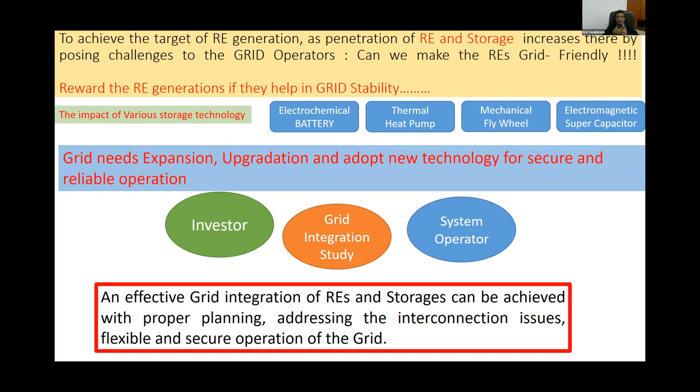We can have proper planning, we can address the interconnection issue. Therefore, certain grid codes have been developed in different parts of the world - Europeans have their own grid code, India has its own grid code, so everybody has their own grid code. It tells about the strategy of integrating this renewable into the grid so that the grid becomes robust and should not lose its stability. So we want a flexible and secure operation of our grid.

So the smart grid technology which we are focusing upon is the flexibility service from distributed generation. We are coming up with a prosumer driven approach.

Suppose I have rooftop solar in my home, in a society, or in a smart building with solar generation of your own. Either you consume your own power, or if you have surplus power, you can sell it to the grid so that during peak generation hours, the grid impact can be tolerated to some extent. That is generally what we call local power balancing.

We do demand response, so the consumer as well as the producer. If I have rooftop solar, I act as a prosumer - I am a consumer, I am a producer. But when I have to produce and when I have to consume should be balanced by some policy, by some incentive. Otherwise, I won't go for that.

That's why the new smart grid technology, even in India, we are now planning to propose or implement demand response. And similarly, storage is another choice.

For example, if you cannot deliver, you have excess energy - you're producing more solar energy in the daytime, but all my appliances are not used during that particular time. So I'm talking of a single home. If there are thousands of homes, hundreds of homes together in a cluster, now it's a concept of a microgrid. We can frame our autonomous microgrid so that my power can be used by my neighbor.

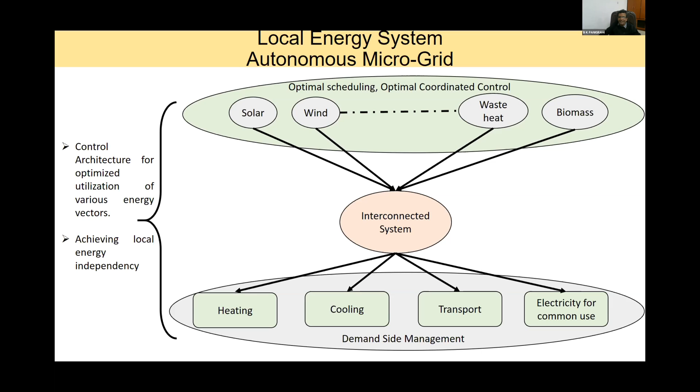So there are two things I will discuss: either it is an autonomous microgrid where there is no grid, or you can interface it to the grid and have a balance so that your dependency on the grid can be reduced. This requires one of the standards recently developed in India, particularly for the interconnection of renewables and how ancillary services can be achieved by these energy sources.

These are some electrical parameters - how to maintain the voltage, how to control the frequency, how they can take part in different ancillary services. I'm not going into the detail of that, but these are the standards. My sincere request to young researchers is that they are also encouraged to look into these standards. The standards may vary from country to country, but at least the range of voltage and frequency which you can tolerate can be decided by regulatory commissions.

So finally, this is a microgrid. We can work in this microgrid having a lot of communication technology. Once you have the communication technology, the challenge is cyber security. Cyber security is a must in the smart grid scenario, particularly to protect this critical infrastructure. So that is another aspect of the research domain in this particular area.

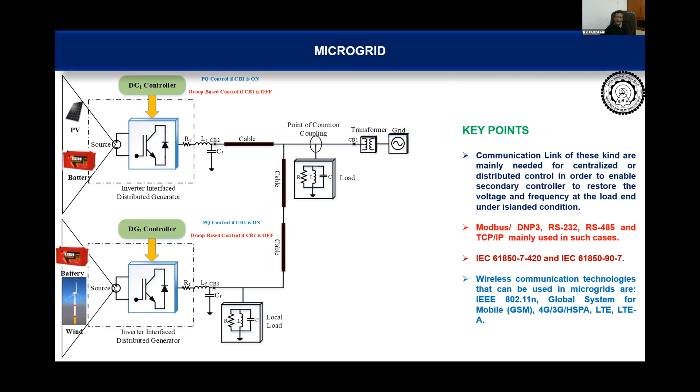These are the challenges which I have already put to you. And thank you - I'm just concluding my talk because I've just crossed the time by 2-3 minutes.

Basically, my emphasis here is on the various research domains which can be incorporated into an existing grid. The research can be done in any part - either it is material development, it may be solar cell material, fuel cell material, it may be anything, heat energy production, local energy support. My sincere request is that there are various vectors of power generation, and these vectors of power generation have to be efficient simultaneously.

Why we are generating it? It has to be integrated to the grid. So we have to look into also the grid condition. We have to support the grid, because all these generation are power electronic generation, which make pollution to the grid. Pollution in the sense the injection of harmonics and other things. So we have to avoid that. So that is the main thrust research area.

So last line, this research is interdisciplinary research. So we have to join together to do this particular interdisciplinary research and do something in this energy sector or storage sector. It is not an individual research. So that's why all the ideas which will be gathered today, we'll take it as a challenge. We'll try to solve different challenges.

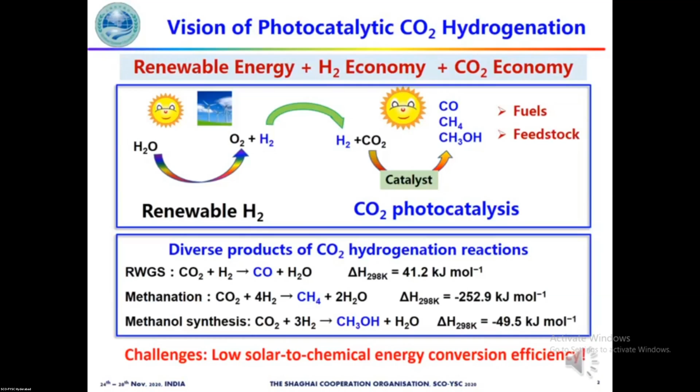To improve the energy conversion efficiency, a new photocatalytic pathway was recently developed based on the photothermal effect of nanostructured catalysts. In this process, the catalyst is locally heated to a high temperature by the sunlight and then drives the thermocatalytic reactions. This photothermal-catalytic pathway can utilize many more photons from the sunlight, essentially across the entire solar spectrum. However, the photothermal properties and catalytic performance have to be balanced in existing photothermal materials, and these two parameters are key factors affecting the efficiency.

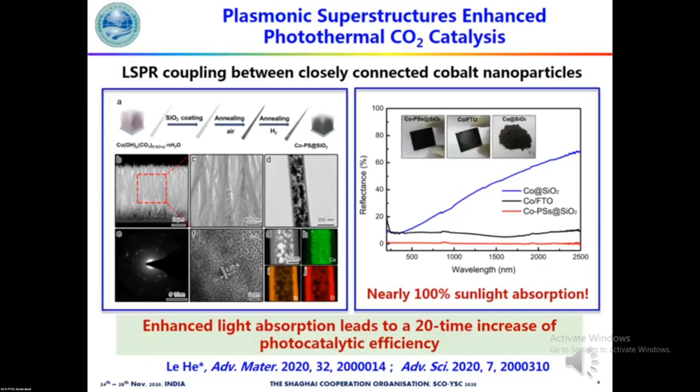My group has made great effort in the development of catalysts with enhanced photothermal catalytic properties. We have been trying to improve the photothermal property of materials without sacrificing their catalytic performance. Here, I just want to show you one example of our catalyst, which can maximize the absorption of sunlight and thus increase the photocatalytic efficiency by 20 times.

I have to point out that there's still plenty of room for further improving the energy conversion efficiency of photothermal CO2 hydrogenation processes. Along this direction, we will design catalysts with both excellent photothermal and catalytic performance by breaking the limitations of existing materials. By doing that, we hope to achieve a 5% efficiency of solar to chemical energy conversion in the near future, which is comparable with that of natural photosynthesis.

To make our dream come true, it is necessary to find collaborators from different areas. First of all, besides materials, the design of a photocatalytic reactor is also very important to increase the energy conversion efficiency. Experienced chemical engineers are more than welcome to help us design better reactors. Second, we are also looking for collaborative studies on the mechanism of photothermal catalysis. The knowledge on the mechanism is very useful to provide a guideline on how to design better materials. We are particularly looking for experts on the simulation of catalytic processes.

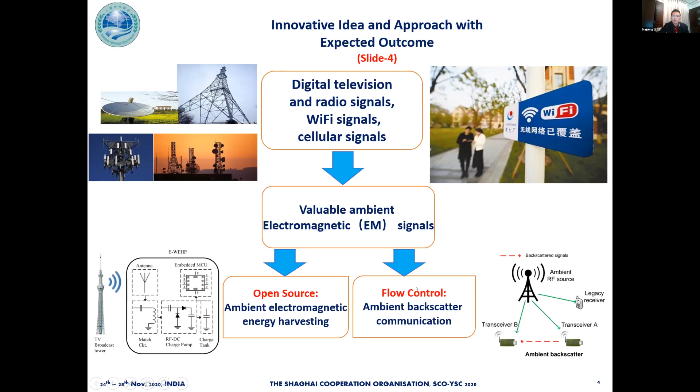So for ambient EM energy harvesting, the traditional method is to use a rectifier antenna to convert the radio frequency energy to direct current and then store it. But in our group, we achieved the conversion from radio frequency to direct current by loading PIN diodes directly on the strong currents at the metasurface.

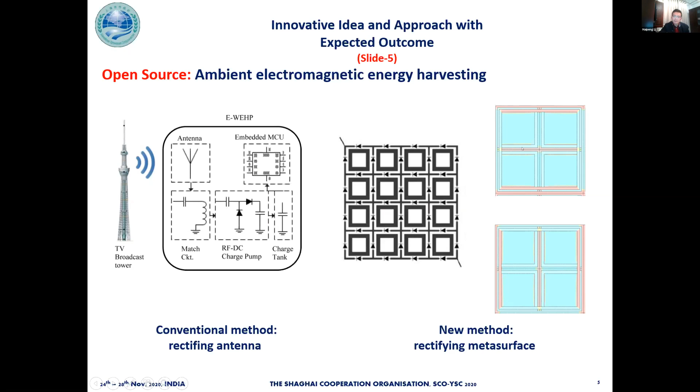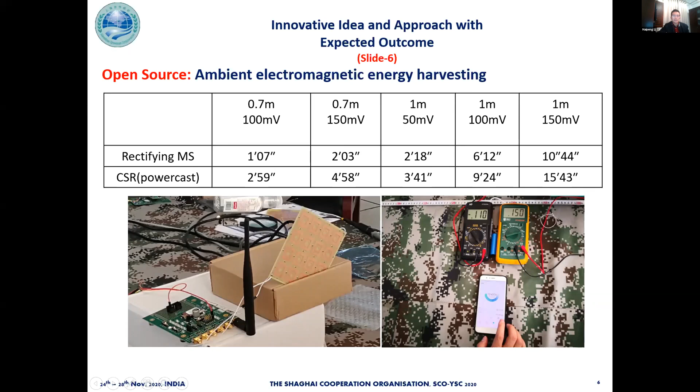We compared the CSR evaluation board of Powercast Inc. with the rectifying metasurface we have designed. By recording the charging time at the same distance and power, the results show that the new method can harvest energy almost twice as fast as the traditional one.

When the PIN diodes on the metasurface are turned on, the input waves will be reflected, and we can regard this state as state 1. And when the PIN diodes on the surface are turned off, the input waves will be transmitted, and we can regard this state as state 0. By controlling the states of the PIN diodes, the information can be modulated on the scattering waves easily.

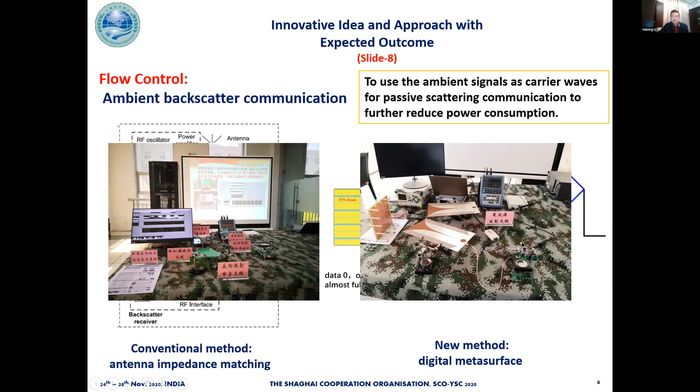Here are the traditional and the new ambient backscatter communication systems built by our group. The left picture is the traditional one, the right is the new one. The new system has a communication distance over 50 meters.

In summary, our research will provide new methods for the realization of a new generation of IoT with high spectral efficiency, no energy consumption, and no maintenance. So in the future, we can conduct extensive collaborative research in many areas, such as intelligent agriculture, environment monitoring, intelligent building control, wearable body information sensing, and smart home.

In related fields, we have already worked with the research group led by Professor Probert at the Indian Institute of Technology. So far, we have an invited paper in IEEE ISWC 2019, and we also have a collaborative paper in IEEE OJCOMS. As the results show, our method can achieve better transmission reliability with the same spectral sharing factor.

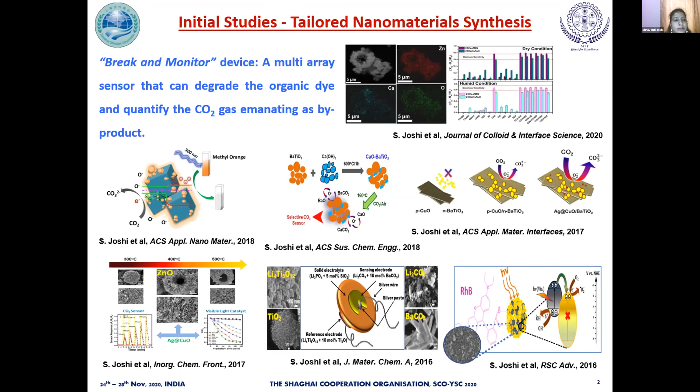Moving on, calcium titanate with a basic chemical formula ABO3 has a distorted perovskite structure and is an incipient ferroelectric and diamagnetic material. In a first of its kind, exotic calcium titanate nanoarchitectures were synthesized using a solvothermal method with tailored facets and an in situ self-doping mechanism. Here the X-ray diffractogram reveals high crystallinity and an orthorhombic crystal structure. Further, if you see the FESEM images, you can realize good quality tailored facets.

Further, here we did not use any co-catalyst and still managed to achieve a better CO2 conversion rate, as illustrated by this image. As for the conclusion of the study, among all the nanostructures synthesized, only hierarchical spheres gave us good photoreduction capabilities. Under UV light, 3 times more fuel-based products were produced, whereas under visible light, we were able to achieve 8 times the capacity. This is when compared to standard anatase titanium dioxide. Based on these encouraging results,

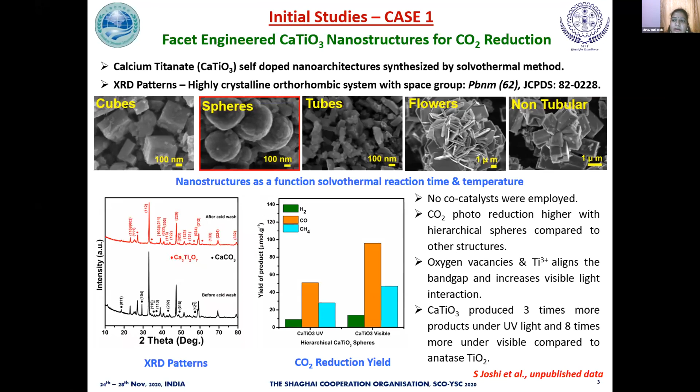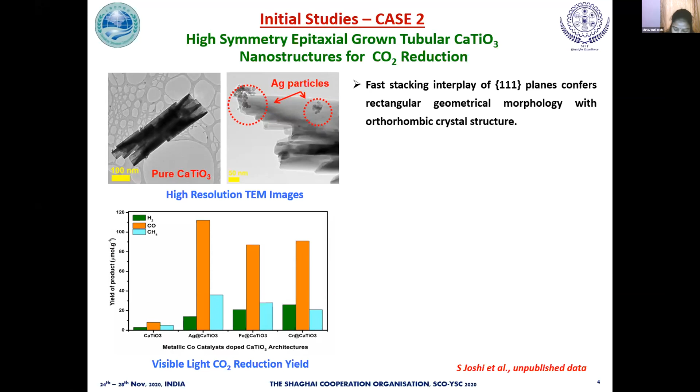we further developed a different chemical strategy wherein we used high symmetry epitaxially grown tubular calcium titanate nanostructures for photocatalytic CO2 reduction. A careful observation of XRD and TEM studies reveals the fast stacking interplay of (111) planes confers a rectangular shape with orthorhombic crystal structure. Now here, compared to the dopants we have used, that is silver, iron, and chromium, with silver nanoparticles we managed to get very good photocatalytic CO2 conversion rates. Further, the three-dimensional nanoarchitecture enabled more light harvesting activity.

Here, the metallic dopants used did not alter the crystal structure, but on the positive side, they enhanced the optical absorption by fine-tuning the band gap. Although the results were exceptional, these results are only good from a publication point of view. If we see commercialization plans, a few drawbacks such as difficulty in forming good quality thin films as well as photocorrosion really hindered our plans for commercialization.

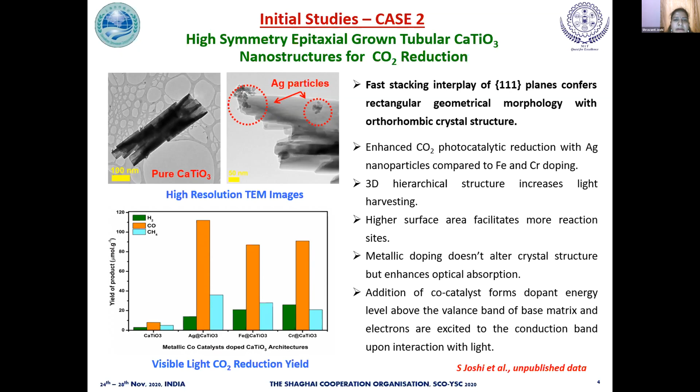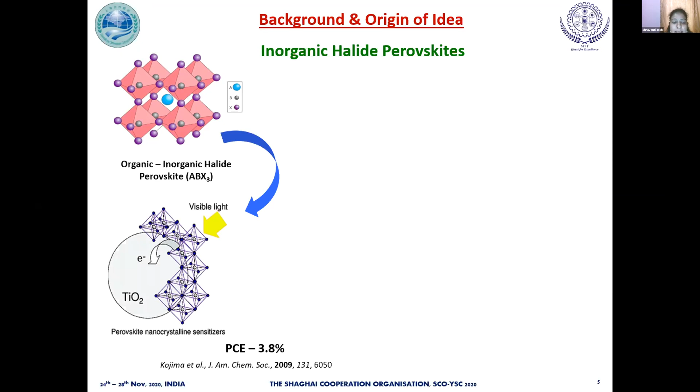Again, we were back to zero position, and at this point, we really pondered over many materials, and the search led us to organic inorganic halide perovskite. Now, these perovskites are very promising in solar cell application. Their sudden increase in popularity was observed when organic inorganic halide perovskite solar cells showed improvement in power conversion efficiency from an initial value of 3.8%, as reported by Kojima et al., to 22% in a matter of just 6 years.

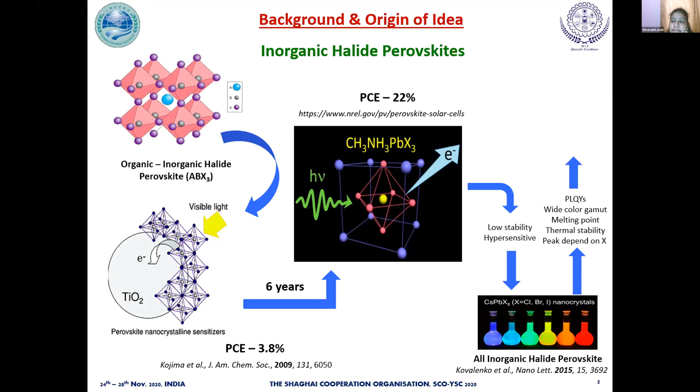In the wake of such remarkable performances, a few demerits such as high sensitivity to humidity, oxygen, heat, as well as low stability restricted their use. Now, inspired by these drawbacks, in 2015, Kovalenko et al. for the first time reported on an all inorganic halide perovskite comprising cesium, lead, chlorine, and bromine. In addition to overcoming the previously mentioned issues, the inorganic halide perovskite in the report showed many excellent properties as listed here, thus hinting at a class of exceptional nanomaterials for CO2 conversion.

In recent time, Kuang et al. and Xu et al. reported on cesium lead bromine quantum dots for photocatalytic CO2 reduction. In both the reports, exceptional results were mentioned. But if we look very closely, lead toxicity and lower service life further restrict the commercialization plan.

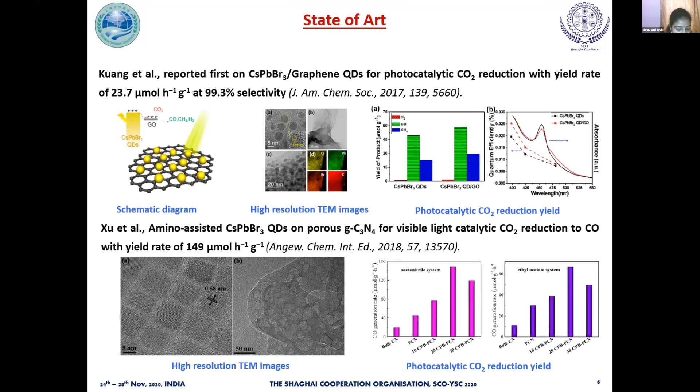Now, inspired by such scope, through our ongoing DST project, we plan to overcome these issues by developing lead-free inorganic halide perovskite-based cost-effective devices. Currently, we are focused on developing portable devices integrated with solar ink based on such perovskite nanocrystals. The work is being done in collaboration with Aston University UK and Greaves Cotton Limited India.

Now, recent trials gave us good results in terms of highly monodispersed spherical morphology using green chemistry routes. Further, we were able to form single crystal thick films on glass substrate and effectively reduce CO2 gas to value-added products. As per our trials, we are very confident that the solar ink technology that we are developing in our lab has full potential for adoption from a commercial point of view for green fuel production. We are currently working towards two main outcomes in terms of improved process conversion efficiency as well as gram scale synthesis.

Scientific collaborations for us are an opportunity to engage in collegiality and lend credibility and validity to our research activities. We are actively engaged with many overseas universities in terms of knowledge transfer, development and fabrication of prototypes for energy generation, chemical sensors, and medical diagnostics. Currently, we have Dr. Wiley, who is a collaborator through the DST project. A few months back, we had also collaborated with Professor Tamara from Tomsk State University, Russia.

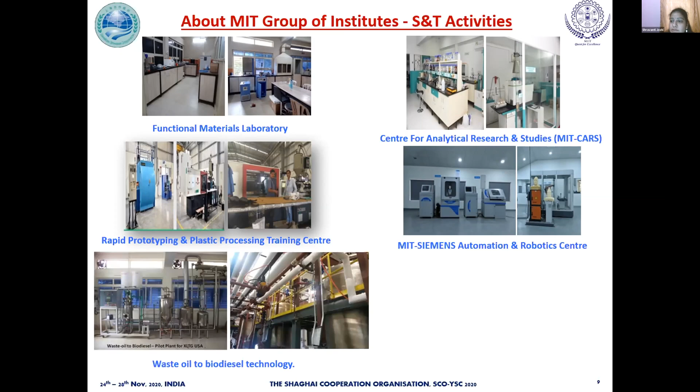At MIT Group of Institutes, we have a wide range of basic science and technology-based activities going on. For starters, we have the Functional Materials Laboratory, which is a DST-sponsored lab fully equipped to carry out research in the areas of nanomaterials engineering, chemical sensors, and heterogeneous catalysis. Then we have MIT CARS, related to agricultural activities, soil testing, and so on. Then we have rapid prototyping and plastic processing training centers, and an automation and robotics center as part of advanced CAD/CAM/CAE learning. We have also in the past done a few biodiesel related projects as well as solar power plant projects.

Moving on, currently we have a BIRAC sponsored MedTech lab and incubation center. Again, MIT SIP, which is an industry relevant micro enterprise dealing with plastic processing. Then we also have the Center for Advanced Material Research, which basically houses all high-end instruments for characterization. Again, we have ARDC, which is related to agricultural activities. Currently, this ARDC is in collaboration with Israel and other overseas universities.

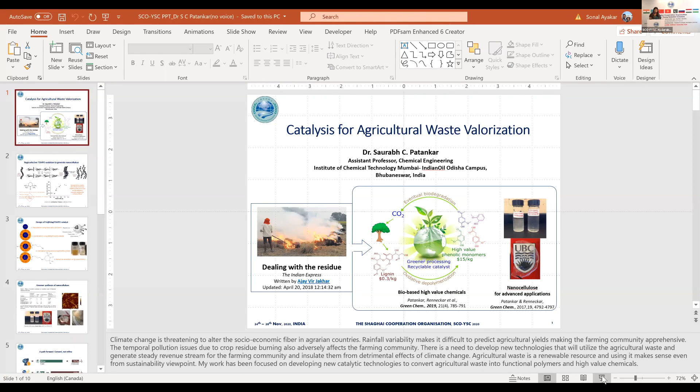I hope you can see the screen and I'm audible. Hello everyone, I am Dr. Saurabh Patankar, joining from the east coast of India. I am happy to share my perspectives on utilization of one of the largest available natural resources, agricultural waste, and how it fits into the overall scenario of sustainable energy.

Climate change is threatening to alter the socio-economic fabric in agrarian countries. Rainfall variability makes it difficult to predict agricultural yields, making the farming community apprehensive. The perennial pollution issues due to crop residue burning also adversely affect this farming community. There is a need to develop new technologies that will utilize agricultural waste and generate a steady revenue stream for the farming community, insulating them from the detrimental effects of climate change.

Agricultural waste is a renewable resource, and using it makes sense from a sustainability viewpoint. My work has been focused on developing new catalytic technologies to convert agricultural waste into functional polymers and high-value phenolic chemicals. One such high-value functional polymer that can be made from biomass is nanocellulose.

Nanocellulose has a tensile strength like steel. It can be used to make transparent films with excellent gas barrier properties, giving it wide-ranging applications. This molecule, 2,2,6,6-tetramethylpiperidinyl-1-oxyl, or TEMPO, is a classical oxidation catalyst traditionally used to...

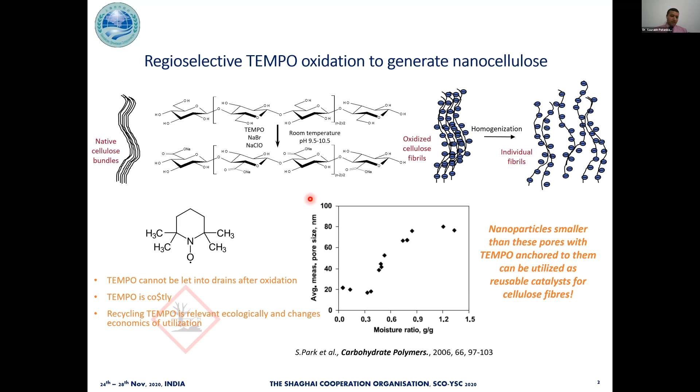I chose to anchor TEMPO on iron oxide nanoparticles that can be easily separated at the end of the reaction using a magnetic force. However, iron oxide is susceptible to change in its oxidation state due to reaction conditions like high pH and the redox environment. So I coated these nanoparticles in silica or glass and then covalently anchored TEMPO by consecutive silanization and reductive amination steps.

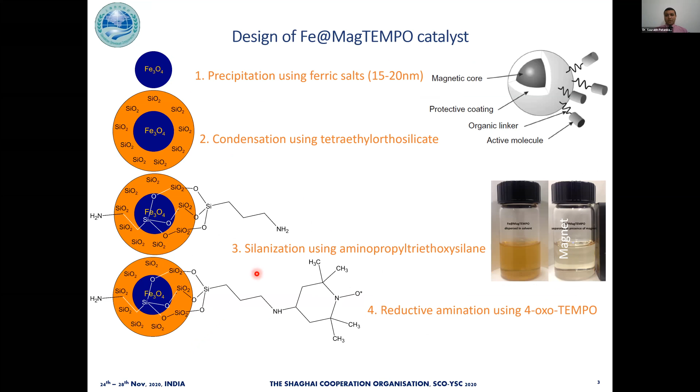I was able to synthesize nanocellulose with the same properties as one made from the usual homogeneous or free TEMPO process. Even the rate of reaction with hindered TEMPO due to anchoring on nanoparticles was similar to the free TEMPO reaction rate, albeit at a slightly higher temperature.

We further used this sustainable nanocellulose, made using this new heterogeneous catalyst, to make tubes which can further be used for some biomedical applications.

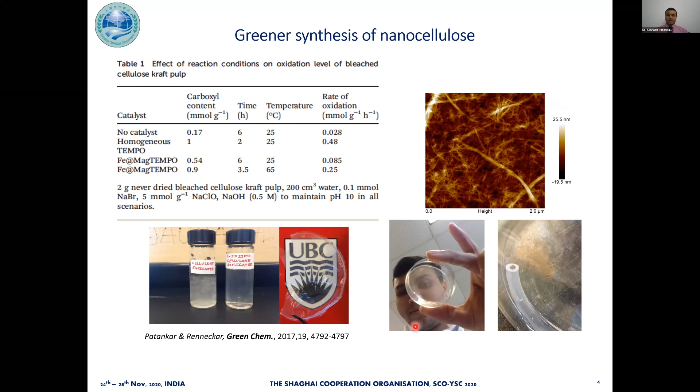Now, moving into my current research and the way forward, I strongly believe that measuring is knowing. I developed a metric called the V factor to estimate the profitability of biomass valorization processes, considering factors like capital expenditure, operational expenditure, process yields, resource availability, price fluctuations, tonnage of manufacturing, etc. It has been a realization through that exercise that unless sustainability is the only goal, it is not profitable...

...to make only energy from biomass. If we focus only on the energy point, it really becomes difficult to compete with traditional fossil fuels, which are way cheaper in the current scenario than energy derived from biomass.

Biomass is a polymer with a unique combination of carbon, hydrogen, and oxygen, making it suitable to make functional polymers with only slight modifications. Depolymerization of biomass can yield chemicals typically made by isolating and oxidizing hydrocarbons. Thus, biomass is best suited to make high-value petrochemical analogs and novel high-performance materials. For example, lightweight, moisture-resistant textiles can be made profitably from biomass.

Now I'm currently working with a startup company on producing virgin cellulose pulp fibers, vanillin, and oxidized polymeric lignin from agricultural waste. The biomass is first fractionated into cellulose, hemicellulose, and lignin fractions using a benign organosolv process, followed by the oxidative depolymerization of lignin to yield vanillin.

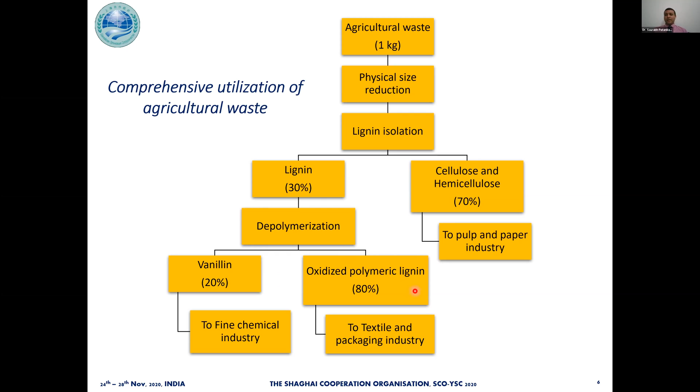So the point which I want to make here is that unless we use biomass for high value applications, using some of it for sustainable energy really is challenging from the economics point of view.

Continuing this work on making high value chemicals from agricultural waste, I focused on this step of making vanillin from the lignin. So I tested the efficacy of the oxidative depolymerization of lignin using the same anchored TEMPO catalyst. This catalyst has free amine groups on it on which the TEMPO is anchored, and I thought these amine groups might be able to give the basic sites essential to abstract the protons from lignin and then start the oxidative depolymerization using the redox sites given by this TEMPO.

The traditional oxidative depolymerization of lignin is done in an alkaline environment, and the process results in around 700 kg of alkali waste per kg of vanillin isolated.

I was able to do this reaction at neutral pH using hypochlorite as a primary oxidant, and I was able to get around 20% yield of vanillin and associated compounds, high value phenolic monomers from kraft lignin.

However, the vanillin yield varies with the lignin type, and I'm currently exploring the variations in order to develop a robust process. An interesting aspect in cost-effective biomass valorization process development is using such multifunctional catalysts that can be used as a divergent technology, targeting many feedstocks rather than developing unique technologies for targeted products.

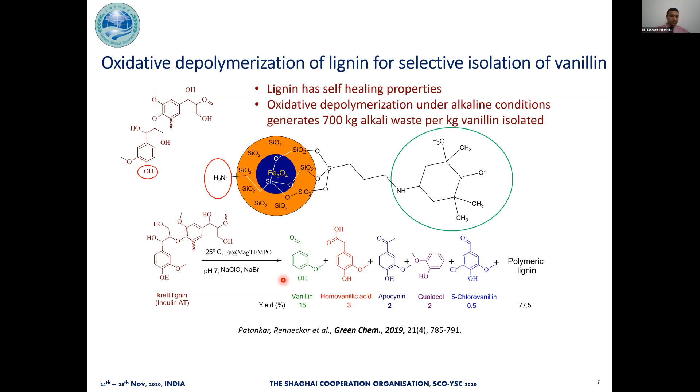Biomass valorization will also be profitable when all these bottlenecks in it, like pre-treatment, fractionation, catalytic conversion, and subsequent purification, are made cost effective and efficient.

So investigating structure activity relationships in materials and designing new catalysts for each of the plausible pathways in this catalog is one of my ongoing activities.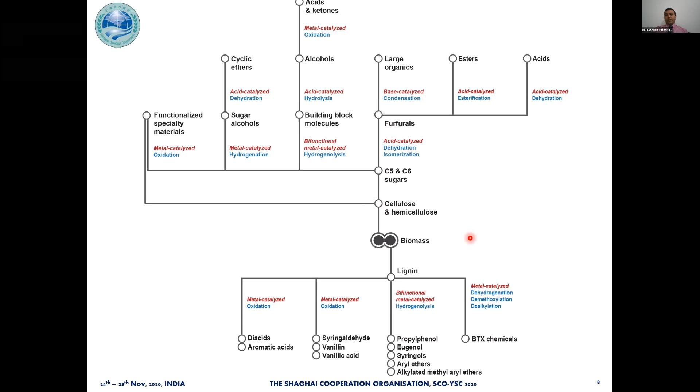So I have divided my work on biomass valorization into three broad categories and seek collaboration with SCO member states in these three domains. The first is focused on feedstock procurement and management, as identifying the quality and quantity of biomass produced with change in seasons is critical.

The second is on catalytic process development, wherein novel reactor systems have to be used for biomass valorization, where new reaction mediums like solid reactions, where the catalyst is in the solid phase as well as the substrate is in the solid phase, have to be used. So I have to explore the use of novel reactor systems for the one-pot fractionation and modification.

When we use these new systems of solid reactions, there is no mathematical framework available to model these systems and extrapolate the results for unknown process conditions. So I also want to work in this area of developing a mathematical framework for these solid catalyst, solid biopolymer interaction reactions.

The third area is on finding new applications for valorization products, as many of these valorization products which we can get from biomass do not have existing petroleum analogs. So we do not know the applications of these products, and based on the structure activity relationships and properties of those materials, we have to explore new applications for such materials.

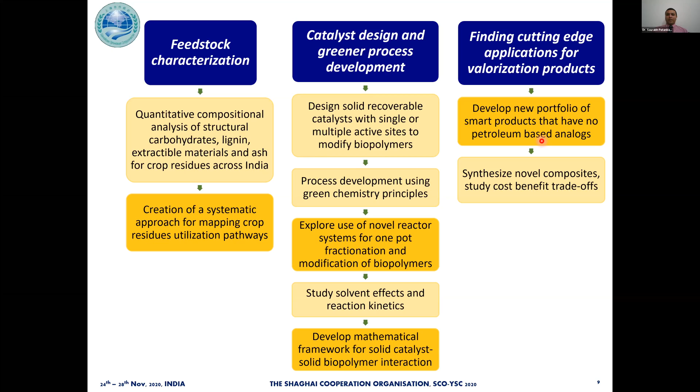Now, finally, talking a little about my institute. My Institute of Chemical Technology was established in October 1933, and it works with the intention of advancing India's knowledge reserves in chemical science and technology.

The institute has grown to become a premier university devoted to education, training, research, and industrial collaboration in chemical engineering, chemical technology, applied chemistry, pharmacy, biotechnology, and bioprocessing. Institute of Chemical Technology has been ranked among the top 10 engineering institutes of India.

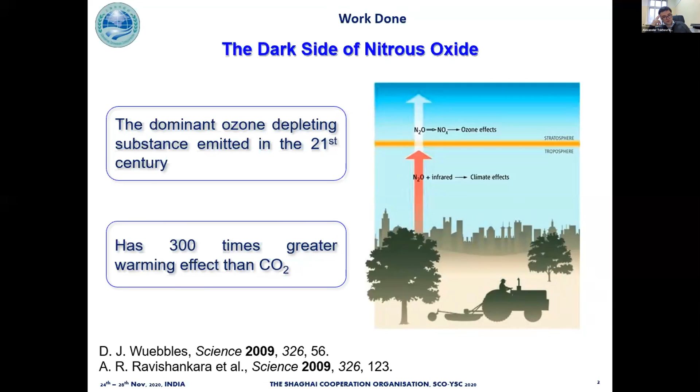And we believe that nitrous oxide is a promising reagent, and one can outline two main directions for developing the chemistry of nitrous oxide. For decades, people tried to exploit its high oxidation potential, to use it as a powerful oxidizing agent and oxygen atom transfer agent. And the second direction, which is much less explored, and I think much more interesting, is utilization of nitrous oxide as a building block for the construction of more complex organic molecules.

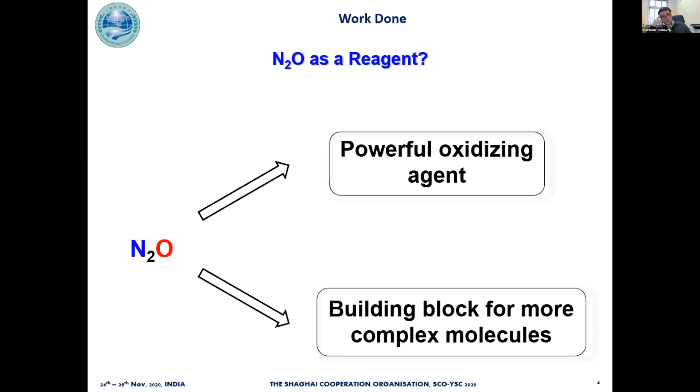So we worked on both of these directions, and here is a small summary of what we've done. I will very briefly mention our most noticeable achievements. We found that some highly labile ruthenium alkene complexes are capable of activating this highly inert nitrous oxide molecule. We even managed to establish some of the primary products of the reaction of catalysts with N2O. And these ruthenium systems are able to efficiently promote oxygen atom transfer to various substrates, so basically to oxidize them.

Also we found that very basic and relatively cheap organometallic compounds also react with highly inert nitrous oxide, resulting in the formation of hydrazines, which are useful nitrogen-containing compounds. And probably fundamentally our most interesting finding is that N-heterocyclic carbenes, free carbenes, are able to fix nitrous oxide at very mild conditions, at room temperature and normal pressures, with high yields; no special requirements are needed.

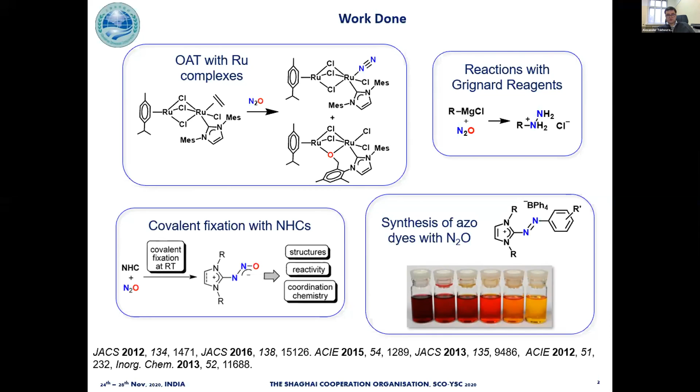So here is a vision of our work. Molecules like dioxygen, dinitrogen, hydrogen, CO2, N2O, and methane are small, and some of them are very inert, like N2O, methane, and also CO2, but they're very impactful. They're critical players in potential future energy cycles. Several of them play a key role in climate change and other important environmental issues.

And because they are involved in elementary reactions relevant to the efficient and reversible storage and release of energy from their chemical bonds, they're integral to all technological scenarios for post-fossil future energy systems and a potentially more sustainable society. As a consequence, massive efforts are being devoted to converting those small molecules to high-value chemical feedstocks and fuels. And mastering the chemistry of these molecules represents a prime challenge of our century.

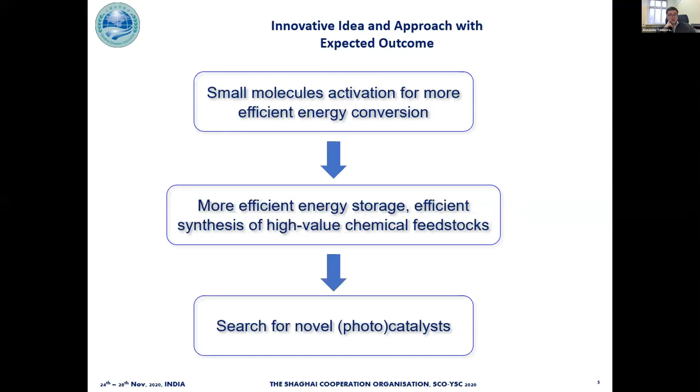Our efforts are currently put into the search for efficient catalysts and photocatalysts for small molecule activation and synthesis of high-value chemical feedstocks on their basis. These are possible areas in which we can collaborate.

So other scientists of our organization, of my group, for example. So I'm interested in organic chemistry in general and catalysis, photo-induced transformations, fluorescent and photochromic materials, and especially in hydrocarbon C-H aliphatic activation.

So briefly about our institute. I'm working in the Semenov Federal Research Center for Chemical Physics. It's named after Nikolay Semenov, who won a Nobel Prize in Chemistry in 1956. The areas in which our institute works are organometallic chemistry and catalysis, photochemistry and femtochemistry. We're also interested in fundamental principles of polymerization processes and structure and properties of new polymers, and also in physics and chemistry of combustion, shock waves and detonation.

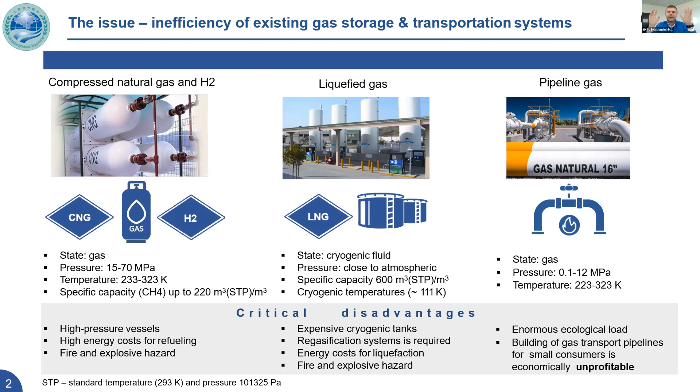That's why we have to apply different technologies for their storage and transportation, such as compression, liquefaction, or pipeline gas infrastructure. Nevertheless, all these technologies possess critical disadvantages, such as high pressures, high energy cost of refueling, expensive cryogenic tanks for LNG, enormous ecological load, and so on. That's why we have to find new alternatives which can be in the future the most promising for the gas industry in common.

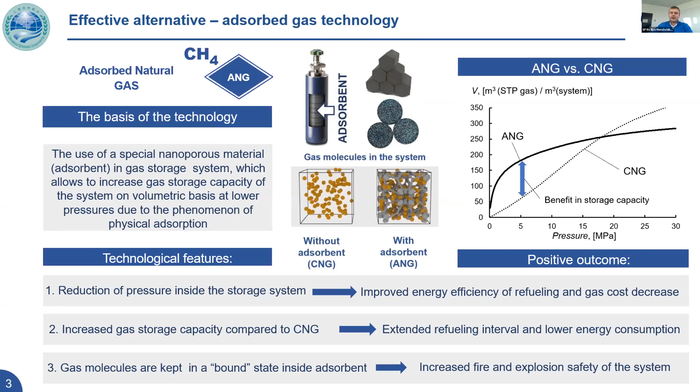And which is very important is that these systems are safer in comparison with common ones, because the gas molecules are kept in a bound state inside the adsorbent. So of course, the key element of these systems is special nanoporous materials. For natural gas or methane storage and transportation, we have to use nanoporous carbon-based materials and carbon-based composites. In our group, we have very good experience in this field, and we design special materials for adsorbed natural gas storage systems.

Of course, we prepared a special route for their preparation. First of all, we simulate adsorption processes and determine the desired properties of the real material. After that, we select an appropriate precursor and appropriate synthesis conditions. Then we prepare the material and correct its design after each test, because we have to prepare an ideal material for gas storage.

And here you can see the results of our research: carbon-based materials for adsorbed natural gas storage with advanced storage capacity and flexibility, high adsorption cyclic stability, mechanical strength, and high packing density. And these are composite carbon-based materials, which also use metal-organic framework structures.

And on the right side of the slide, you can also see the comparison of adsorbed natural gas system storage capacity with compressed gas. And you can see, for example, at 5 megapascal and a temperature of 273 Kelvin, we can achieve a 5-fold advantage in storage capacity in comparison with CNG, which is higher than 200 cubic meters of gas per cubic meter of the system.

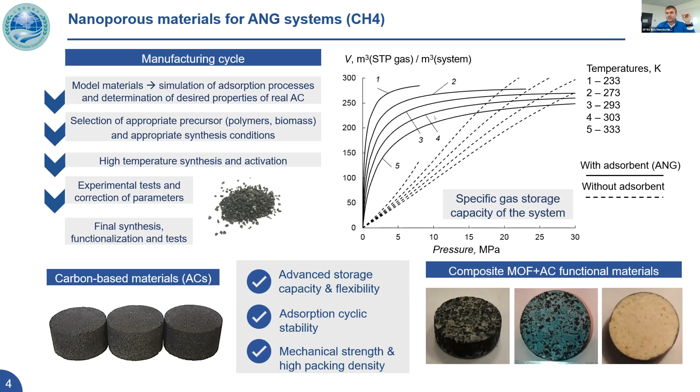If we speak about hydrogen storage and transportation, we need other types of materials. And MOF-based functional materials are the most appropriate because we can adjust their structure and porosity parameters just by changing the metals and organic linkers. But the main disadvantages of these materials are their low density, low stability, and low mechanical strength, especially in the initial powder state. So in our group, we develop special technologies for shaping and functionalization of these materials, and we can produce pellets, tablets, and granular metal organic frameworks.

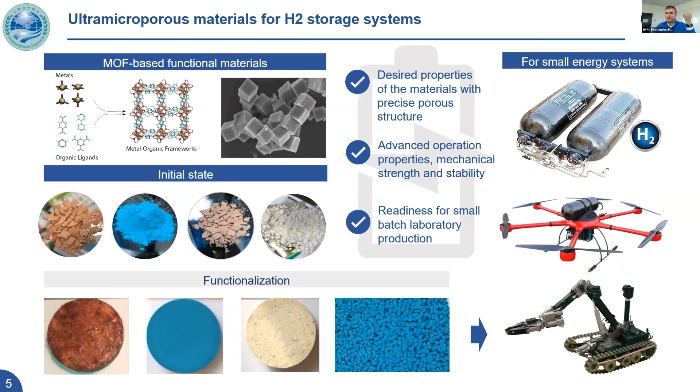They can be used in systems, for example, for small energy applications such as drones, robotics, and other types of small power resources. And these materials have desired properties and a special precise porous structure, advanced operational properties, mechanical strength and stability, and readiness for small batch laboratory production.

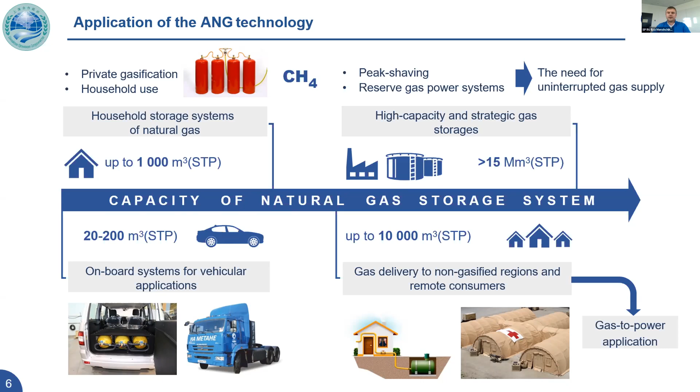So it's necessary to highlight that gas storage in the adsorbed state can be used across the whole range of gas consumers, from on-board systems for vehicular applications and household facilities, for example, heat and electricity, up to very high capacity strategic gas storages with up to several millions of cubic meters of gas inside them. So we can cover all the fields of gas storage and consumption, which is very important. And now I will show you recent results in this field with comprehensive results and devices.

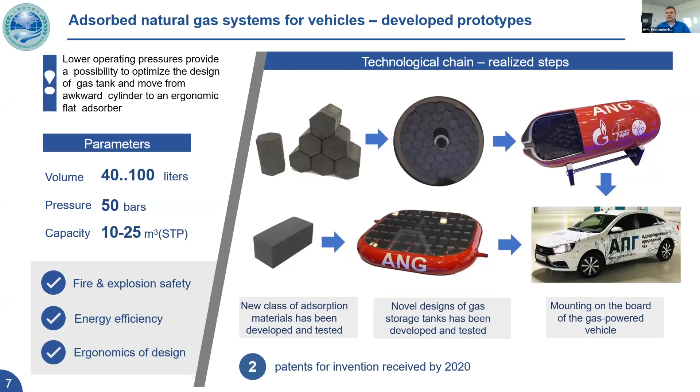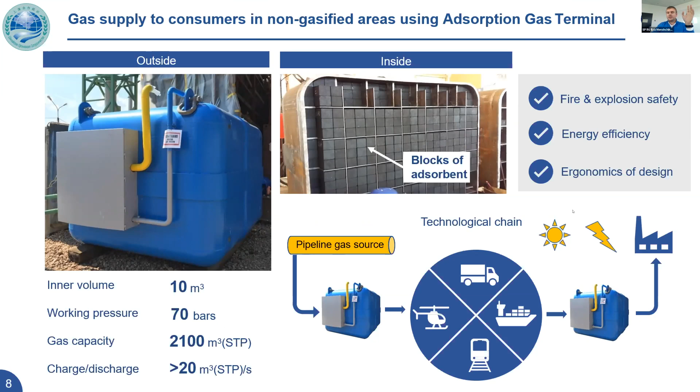And on this slide, you can see the first in the world adsorption gas terminal for gasification of remote consumers or small settlements where it is impossible, for example, to build pipeline gas infrastructure. From the outside, it looks like a cubic container, but inside you can see its cell structure, which is occupied by blocks of carbon materials. This system has fire and explosion safety, energy efficiency, and ergonomic design. It has a volume of 10 cubic meters and works at 70 bars. It can carry more than 2,000 cubic meters of gas. And it's very important that this system has the dimensions of a 10-foot container and can be transported by any kind of transport to the consumer. And afterwards, we can use the gas for electricity, heat, and so on.

And the really important thing is that our technology, if we consider adsorbed natural gas, is the simplest one and the cheapest one. We don't need any facilities for charging or discharging our system, as for CNG or LNG. And also we have no gas losses during its use and operation. And that's why we can decrease the cost of the gas, which is much lower in comparison with that for CNG or LNG systems. And this is very important, and it is the main positive economic outcome of our technology.